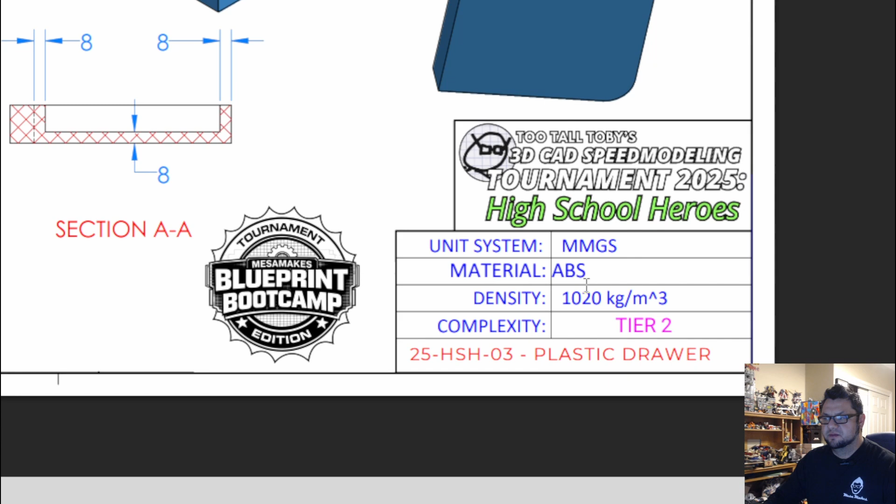So like always, we'll look at the bottom. Our unit system is millimeters and our material will be ABS. Title down here. And this is what we're drawing. So you'll see it's 2 colors because us in the community, we like to say that anytime you see any pink letters, you're going to be in for a treat with some Toby notes. So Toby left a note for us and said all yellow faces need to be 8 millimeter in wall thickness. So we'll talk about how to do that.

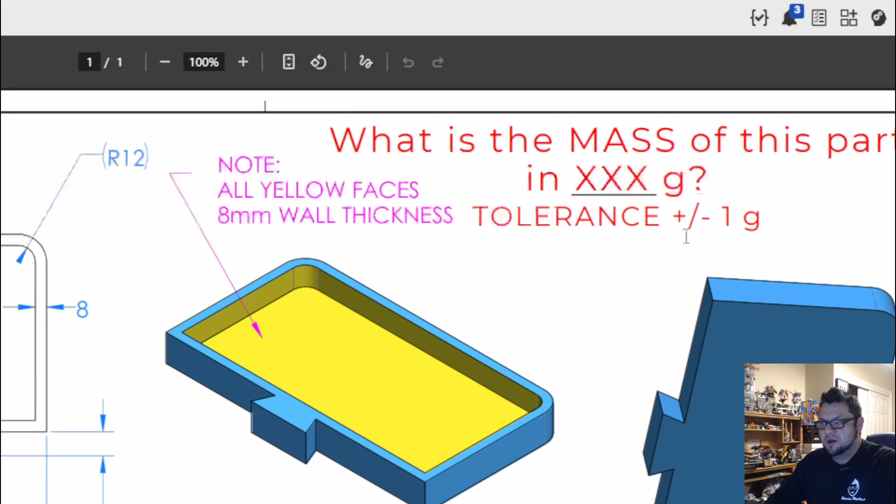Our final mass is, what is the mass of this part in XXX grams, tolerance of plus or minus 1 gram. So we know this is what it's going to look like from the top. If we look at the underside, this is what it should look like. And then we get into our drawings and how we need to make these things.

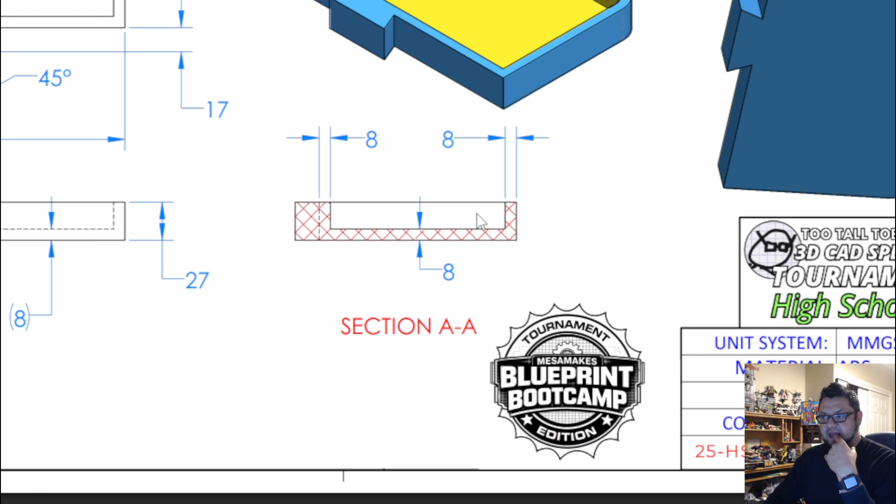So one thing that stands out to me is this section view, the section AA. It's going to show me 8 millimeter wall thickness. And so we see, where do we get that drawing from? It's showing from this section right here, this section AA. Okay. But I think when I draw this, what I'm going to do is draw it from this view right here. So I'm going to start from the top down. Then we'll add our thickness.

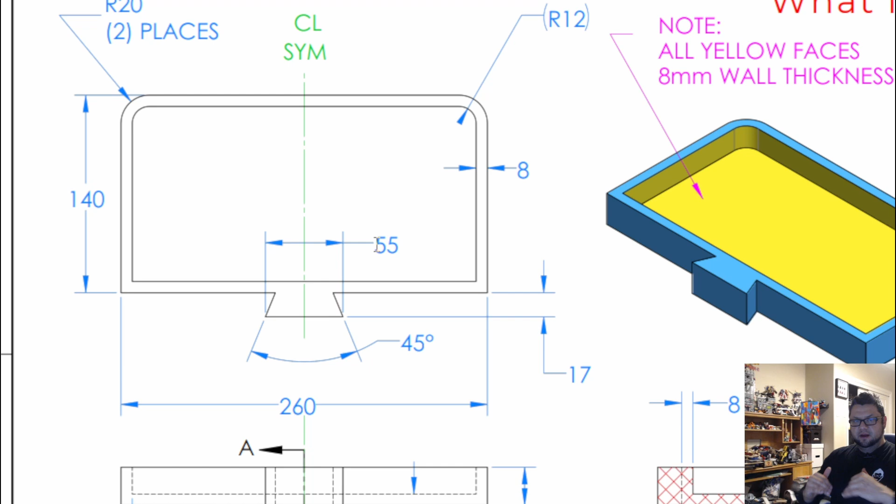I'm going to remove. You could do it with an extrude if that's the way you want to do it, and I'll show that way. I'm going to use the shell command because that's going to give me equal wall thicknesses all the way around. However, the problem is it gives you an extra part you're going to need to fix, and I can show you that. So let's go ahead and jump into Onshape.

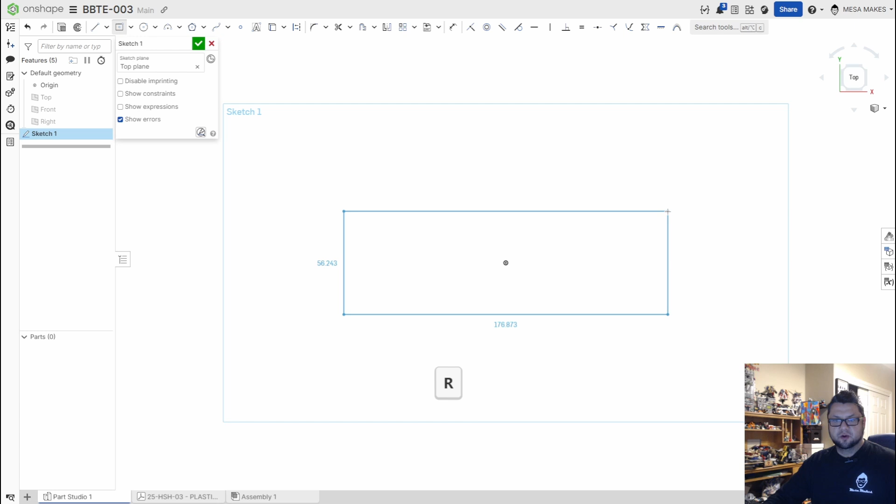All right, once we are in here, let's go ahead and start a new sketch. Shift and S to start that sketch. I'm going to select the top plane, and I'm going to press N to normalize, P to hide those planes. Like I said, I'm going to start with a rectangle. It needs to be 260 wide by 140 tall. So I'm going to use a center point rectangle by pressing letter R. Start on my origin. I'm going to go 260 by 140. And we have our shape here. So we'll take a look there.

Afterwards, I need to draw, we'll jump over here really quick, this little chunk right here, this piece. Okay. So in doing so, what I'm going to have to do is draw myself a center line, or I can turn my planes back on and use that. I'm going to just draw with this a midpoint line, and if we look, we'll see that that needs to be 55 millimeters.

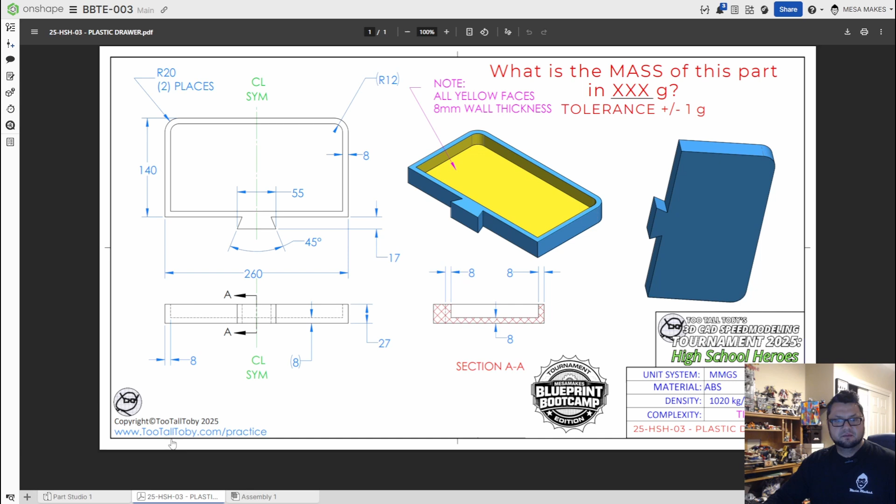So we'll jump on over here. If you follow me up here, I'm going to select the midpoint line. It's a really cool feature that helps, especially in speed modeling. We do this a lot. We have points that we ended up having to add a mid line to. So we're going to click here, and I'm going to tell it 55.

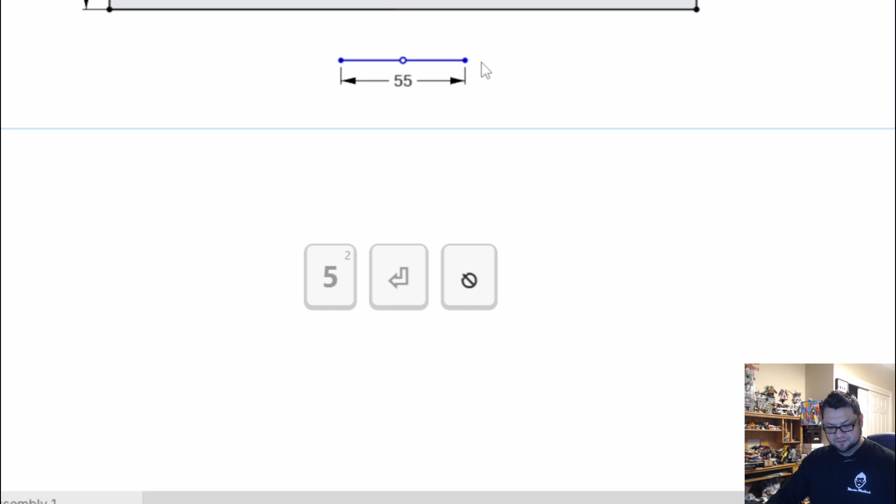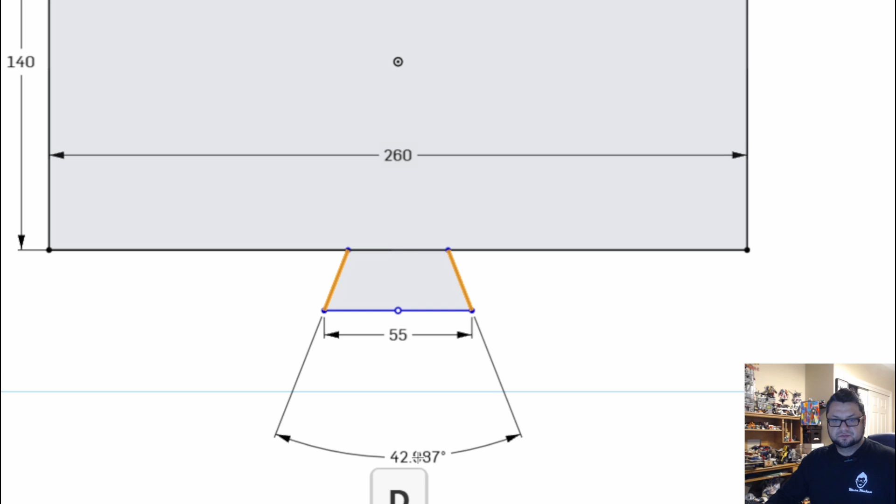And from there, I will be able to draw a line by pressing L and going up here, drawing another line, going here. Now I know those are not perfect, but what I can do is if I select both of them and press the letter E, they are now equal. So no matter what I do to one, they'll angle together. I'm going to give a dimension from here to here of 45 degrees. I'll zoom out there.

The next thing I'm going to do is give it a dimension from here to here. It says on our drawing it needs to be 17. So from the bottom of that to the outside wall needs to be 17. So once we're here, we're cooking. We're doing pretty good. Next thing we need to do is extrude this and make this a 3D object.

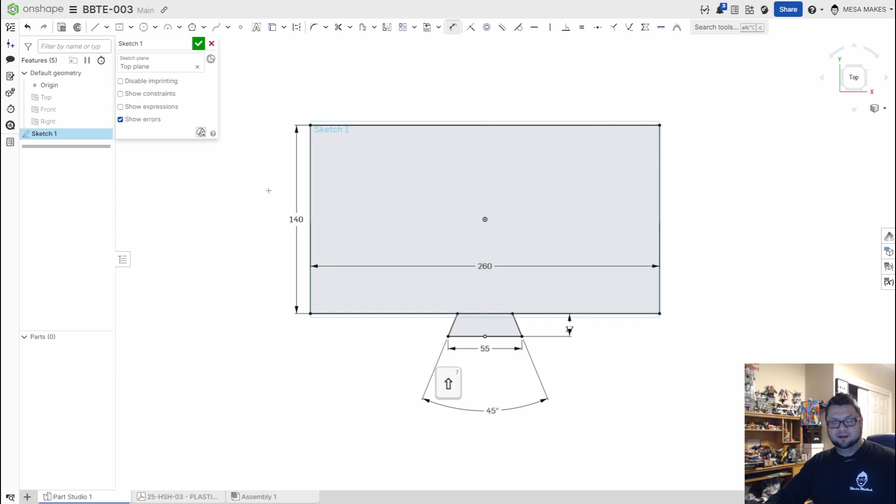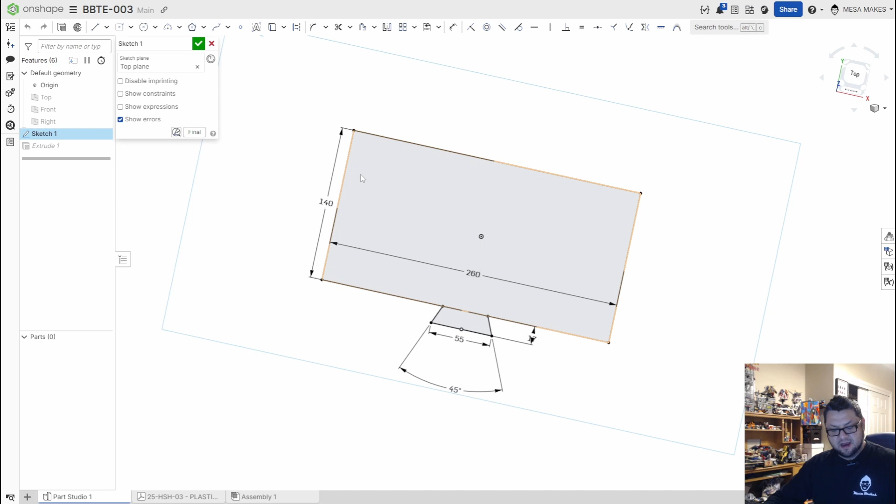Now, some people like to extrude. Let me do Shift and E, and we'll make this a solid object. And that needs to be 27 if we look at our drawing, 27 millimeters. Now this is fine. We're on the right track. We're doing good. Okay. But a couple of order of operation things you want to pay attention to. So if I rounded these corners first, they need to be a radius of 20 on the outside.

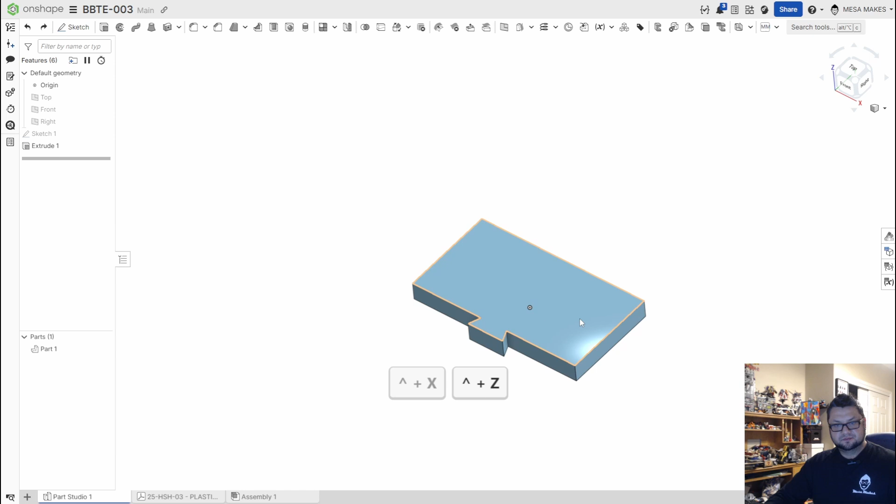20, there we go, on the outside. When I go 3D, they'll already be rounded. So that's one kind of help. If I didn't do that, I'm going to undo that. I could use the fillet tool and select here and here like that and do the same thing.

So whatever you want to do, and I know me and Toby have kind of gone back and forth talking about this before in some commentary. I do a lot of stuff in 2D views. He does a lot of stuff in 3D models. So I kind of am with him in that thinking that, you know, if you can change a fillet, I don't have to go up here into the sketch to figure out where I did that at. So I can edit that feature, and that's what you're going to want to do.

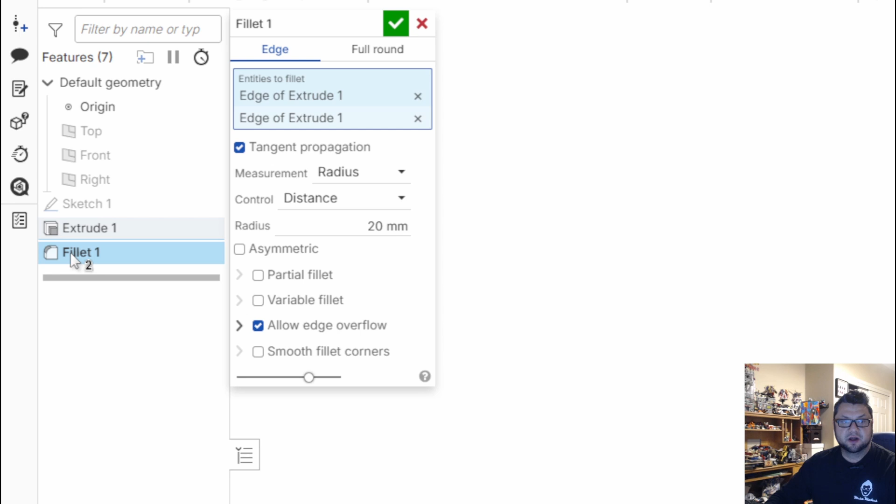So remember, when we do this stuff, we're doing it to work the right way. If I'm going to share this with somebody, I want them to be able to edit and change what they need to if we're working together. If I'm being selfish and I'm working on a project for myself, I kind of do whatever I'm comfortable with. But whatever's going to help you and your work team work together is going to help there.

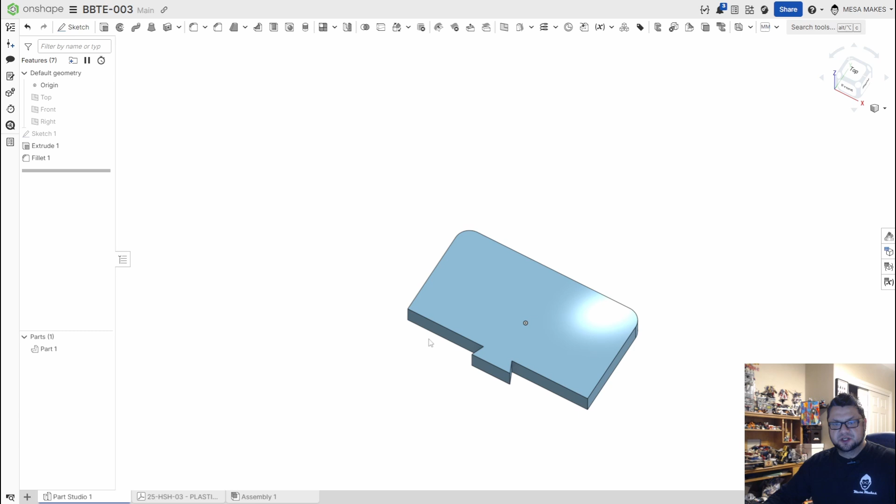Okay. Another thing we want to do, we're going to turn this into a shell, so I'm going to use that shell command, and it's going to ask me faces to hollow, or faces to remove. I'm going to click this top face. Then it's going to ask me my shell thickness. And if we look at our drawing, all my walls are 8 millimeters thick. So we'll say okay, and we'll accept that.

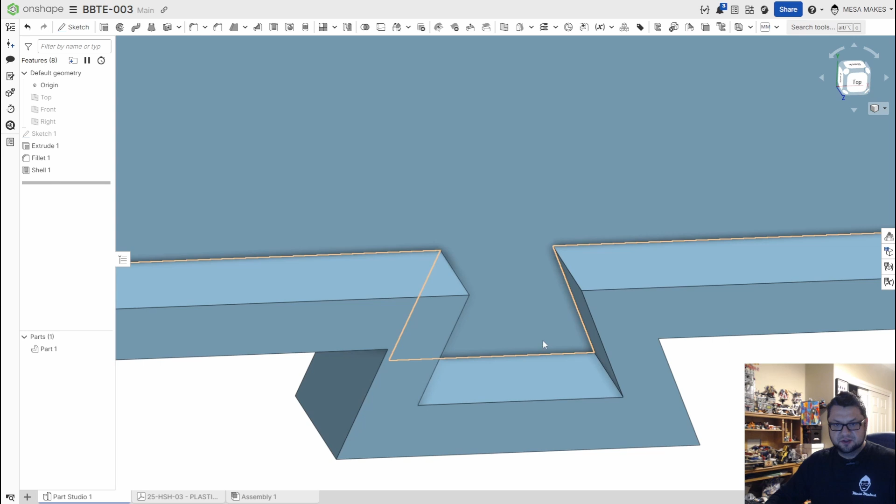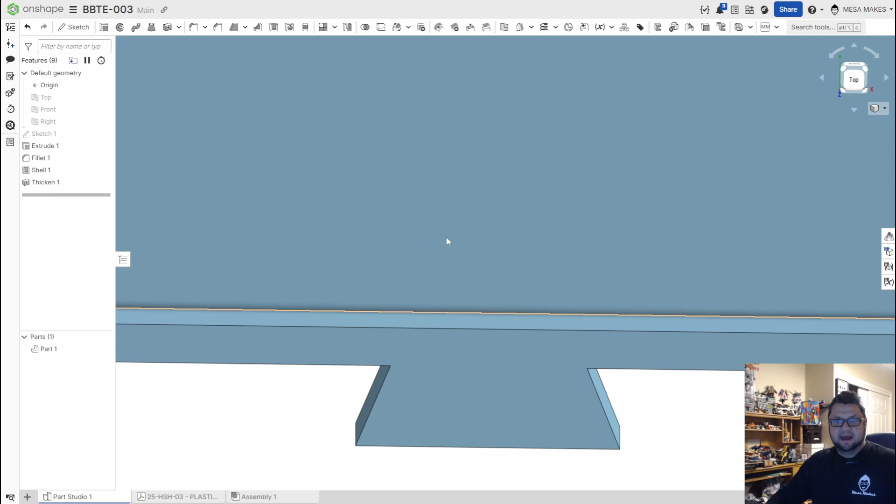The problem is you run into this right here. So what I would have to do now is take this face and do a thicken. And if we do the math, we know we made it 8, but if we go up the 27 that we originally had on my drawing, that will now come flush to there, and we can accept that and add that. And now I'm looking good, and that is what my final part should look like.

We'll go ahead and click this and assign material. Material needs to be from Toby's Custom Materials, and it is made out of ABS. And we'll accept it. Come over here to the bottom to weigh, and I get 435.018. And if I check my answer key, the answer is 435 with a tolerance of plus or minus 1. So 434 to 436. We are perfect, right on the dot, within tolerance.

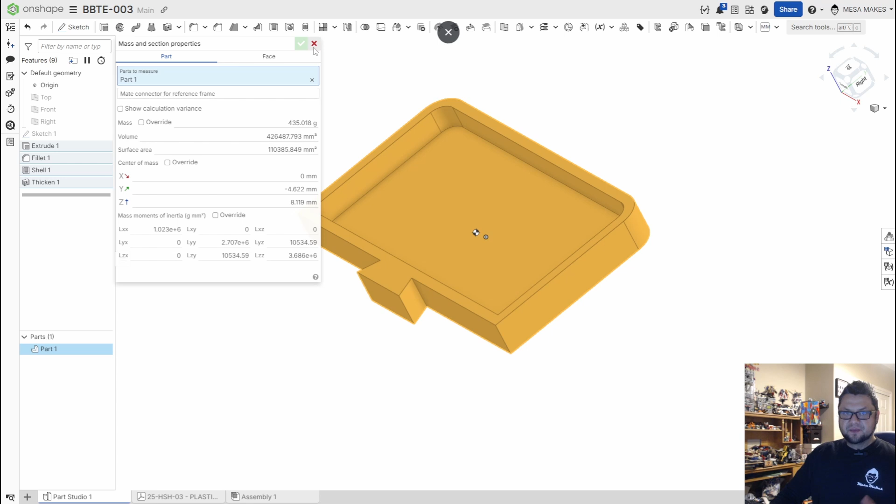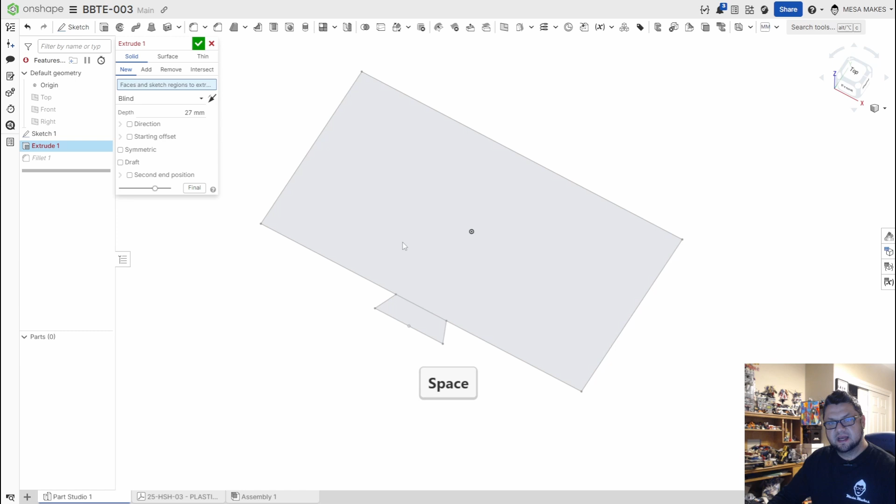Now, I want to show you another way to do it. So remember, 435 is our answer, and we're going to change things and make sure we always end up with that 435. So I'm going to back it up a little bit. I'm going to get rid of the shell, and instead of adding that thicken, you could have done a second extrude. And what would help there is when I first did my first extrude, instead of selecting all of this and letting it auto pick, I can just select that one spot right there, say okay, and then I can do my shell of 8 millimeters.

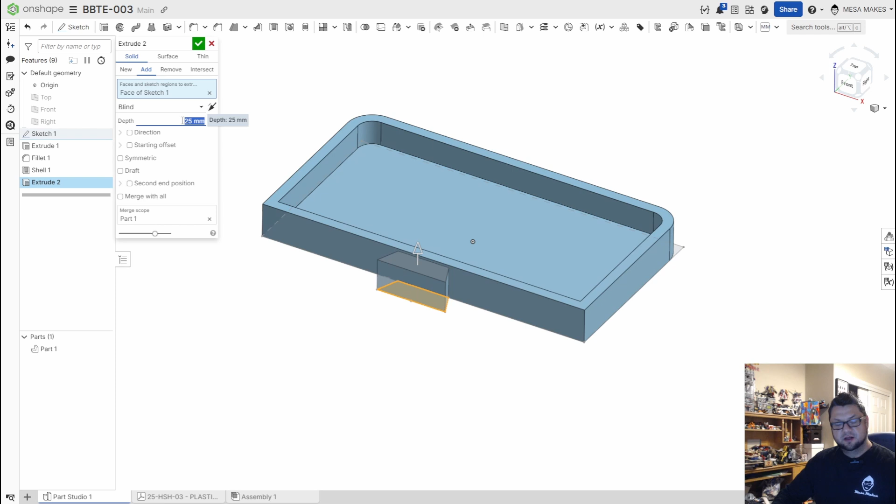And then I could do another extrude of just this piece right here, and I could type the 27, or to make it easy, I could say up to face and select my face. And for the tournament, obviously, whoever gets the answer the quickest is going to get the point. And for speed modeling, that's what we want.

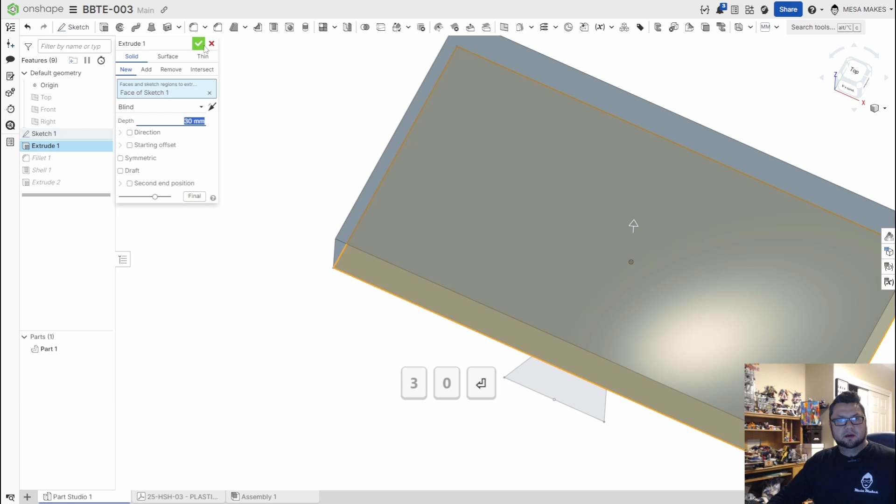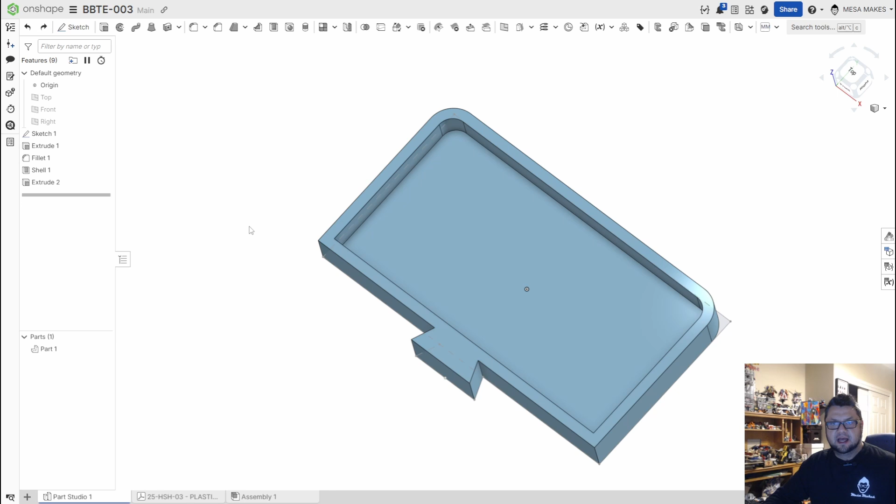But in reality, let's say I were to change this to 30, and you'll see now that piece will always change with it. So that's kind of a cool thing, and it kind of future-proofs your drawings to make sure they work like that. So again, we already assigned our material. If we check our mass, we're still at 435 without having to use that thicken tool. I like the thicken tool though, because it's something you can do to change things on the fly.

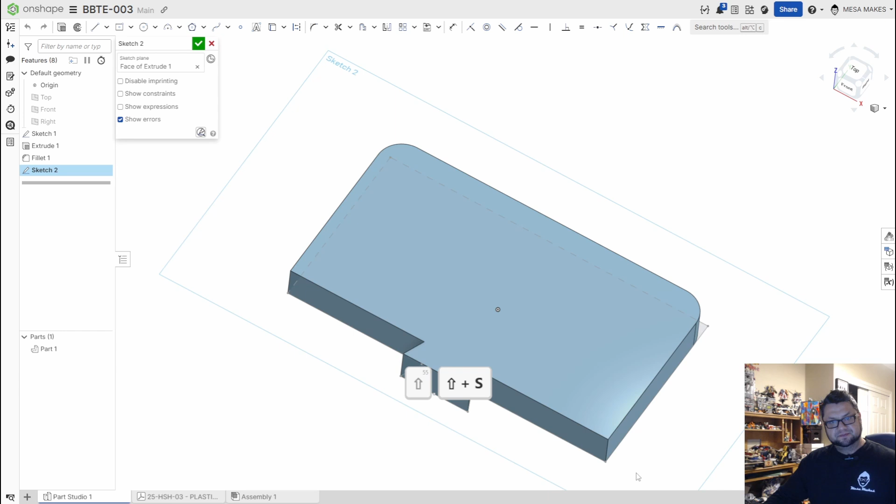Now, the other thing you could do, if we get rid of the extrude and the shell, we go back to our first extrude and we add that one back in. What we could do is draw a sketch on here, and we can say Shift and S. And what we can actually do is offset our wall, but we don't want those pieces. So I'm going to offset. We'll shut off our sketch so we're not looking at that. And I'm just going to pick all of these.

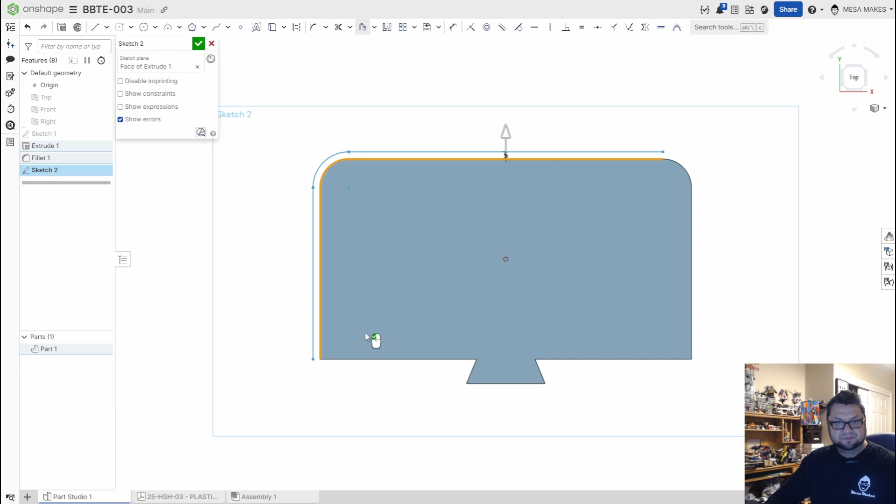And what's going to happen is we're going to have to draw another line. We'll flip it on the inside and we'll say 8 for our wall thickness. And then what I can do is just draw a line really quick there to there. And then now that I could remove, but this is where I'm going to have to do some math.

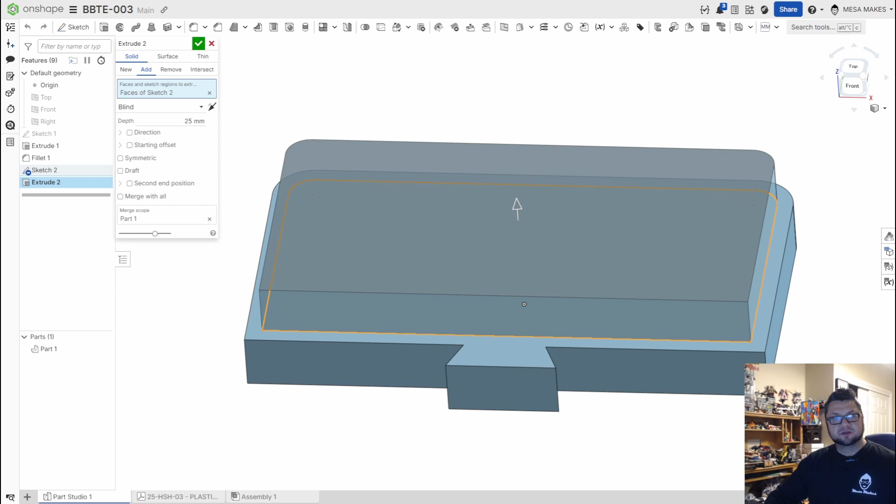So if we look at our drawing, we start with 27. We need an 8mm bottom, so 27 right here. 27 minus 8, and remove, not 825, 27 minus 8. There we go. We'll say accept. Our piece looks the same. We still have our material added already. And we're still at that 435 if you take a look right here on our answer.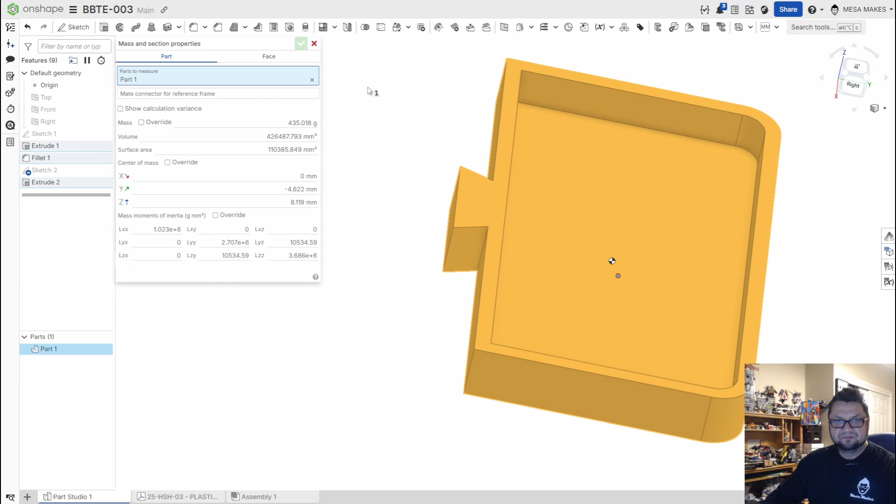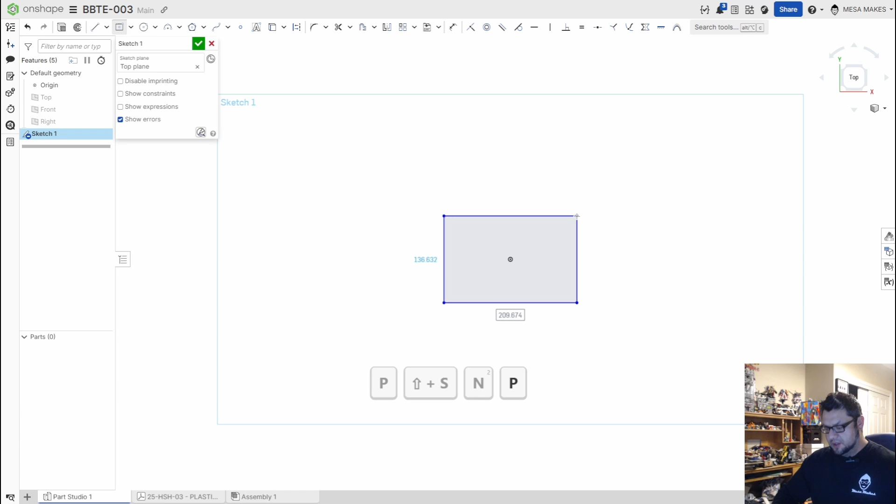So a couple of different ways you could do it. Now, there is a way, let me scrap everything. We'll start from scratch. You could draw everything you need in the same drawing and do it all from different extrusions. So I am going to start on the top plane, Shift and S to normalize, P to hide those planes. Same thing like we did before, center point rectangle, 260 by 140. I'm going to round those corners to that 20, and we'll say okay.

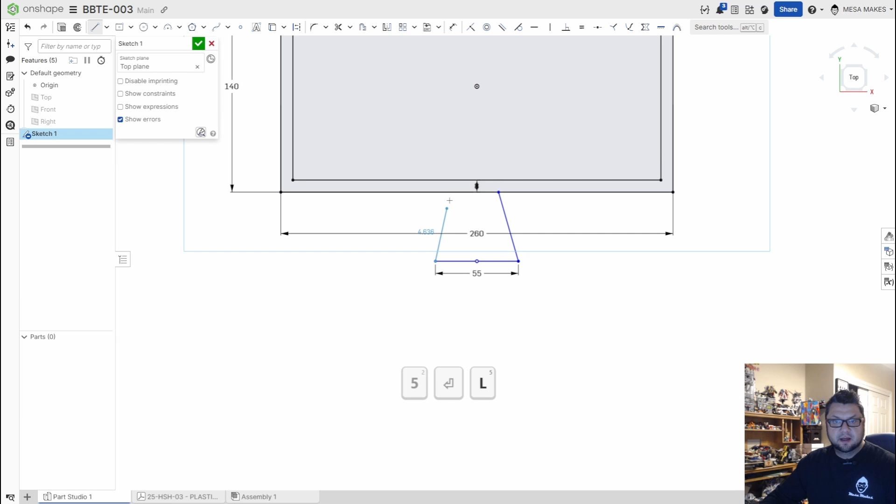At this point, this is where I would offset, and I'm going to offset 8. And then from here, I'm going to draw my midpoint line from here down, boom. That needs to be 55. And then a line up to here, line up to here. I'm going to equal those two. Dimension from here to here has to be the 17. And a dimension from here to here needs to be 45. At this point, I could do this as my 27.

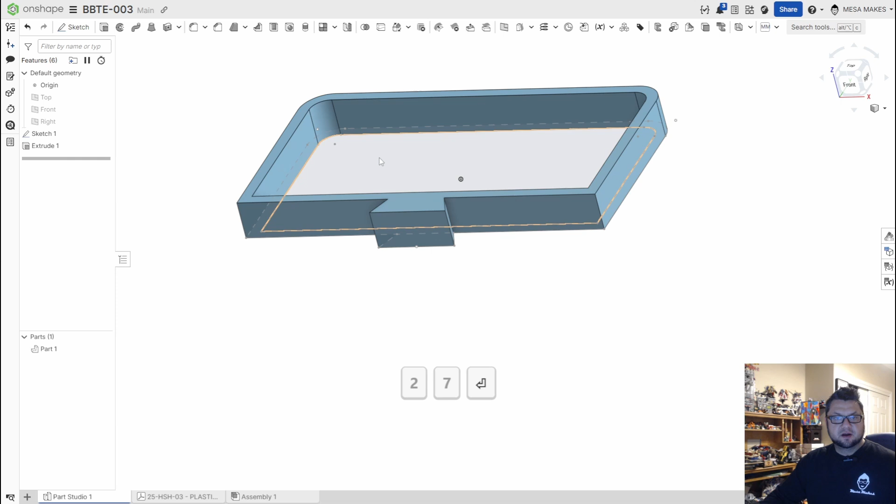We'll say accept. Turn my sketch back on, pick my piece here, and extrude that up, my 8, without having to do any math. I'm going to add it to that piece. We'll say okay. And assign material because I deleted everything. So again, TooTallToby's materials with that ABS. We'll say okay. Click the little scale, and I still end up with that 435.018.

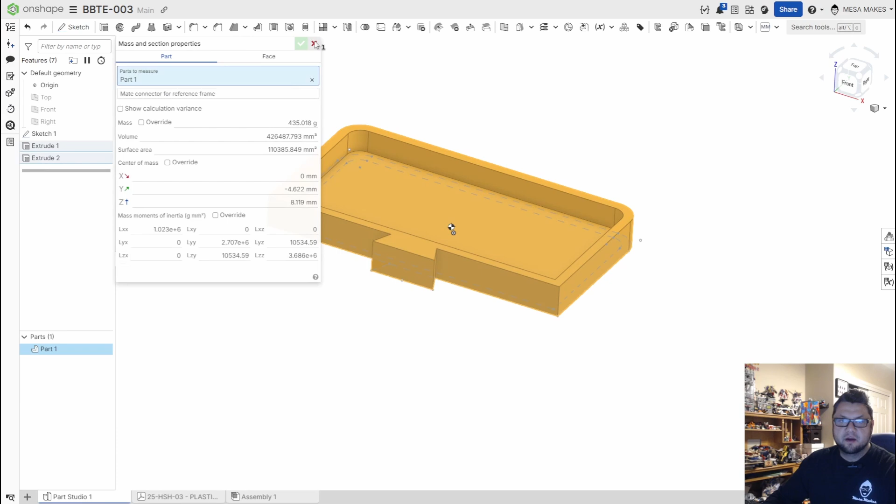So however you want to go about doing this, like I said, there's a million different ways to draw. And I think that's the best part of doing CAD and speed modeling is you can find a bunch of different ways to go about doing things. You might find, quote unquote, the wrong way to do it. And even by doing that, you're going to learn something. So whatever's going to help you get that final drawing.

Like I told you guys, when I first started doing these things, I had no idea that I was using the wrong mass. Part of that was my fault in the fact that I thought I knew what I was doing and I didn't read the simple directions that said add this for your mass. And I was driving myself nuts. So make sure you are adding and doing your drawings the way you feel most comfortable.